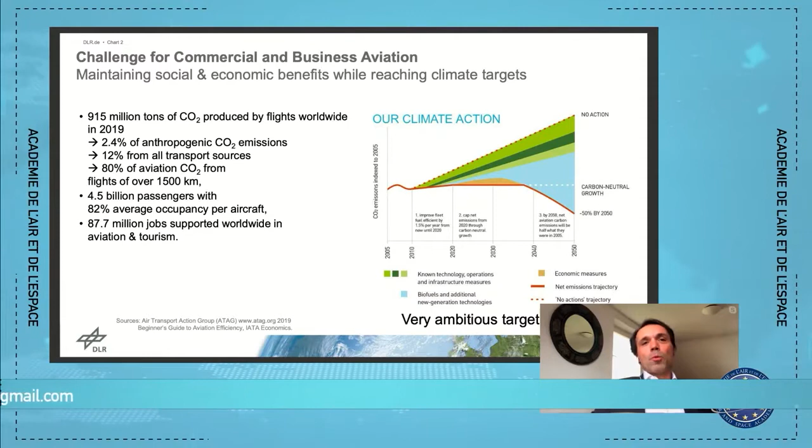Now, the air industry is a huge industry. We're looking at 4.5 billion passengers going from one country to another, one region to another. Well, the movement of people is what creates jobs. We have almost 90 million jobs created by aviation alone. So we can't put an end to that, but it makes sense to organize a transition towards a decarbonated aviation industry.

On the right-hand side, you have a well-known chart. There are many others, but this has been around 10 years. This was in 2010, 2011, so exactly 10 years ago, such a chart existed. And what was being highlighted here, and that should be a strong point, if you look at technological improvement, we can bring down fuel consumption and therefore CO2 emissions to the tune of 1.5 to 1.8% annually. So accumulated, you are looking here at spectacular numbers.

Nonetheless, that is not enough to reverse the trend or indeed to reach the objectives stated by society or indeed the air industry. So, of course, I was fortunate enough to work for a research institute. We take this as a starting point. What we do find is that these goals are very ambitious indeed. So how do we propose to go anywhere near these objectives?

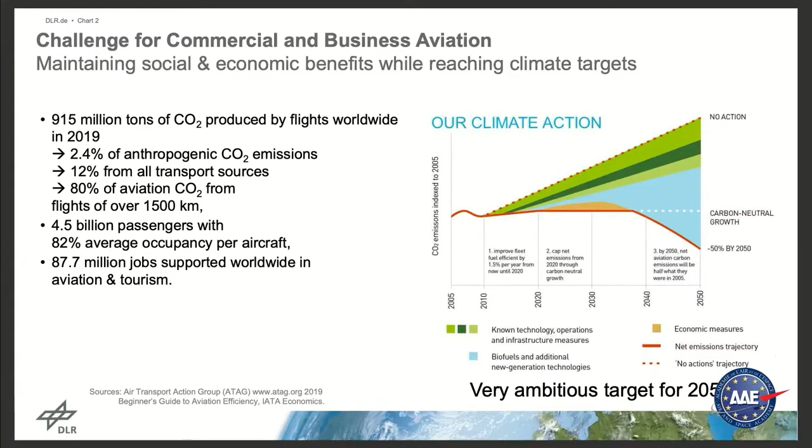And one item that was made clear this morning is the cumulative effect. Global warming related to the concentration of CO2 in the atmosphere is a cumulative factor with very, very long time scales. So even though, and we saw it today, in 2020 we find that there's a significant decrease in air transportation and indeed transportation in general, nonetheless that is not going to bring about a reduction in CO2 concentrations in the air over the same period of time. It will take a much longer period for this to come down.

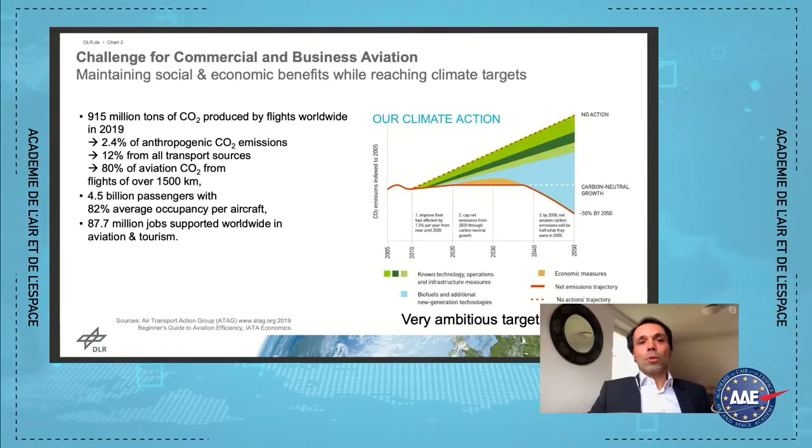So to reach the objectives by 2030 or 2050, we have to start working today. Indeed, we should have started yesterday. We can't expect to start working in 2030 and hope to have results in a few years' time.

Now, on the next slide, this reiterates to some extent what was clearly summarized in this morning's presentation, and of course Xavier went into details of this, but I would like to revisit this chart because you have the emissions from an aircraft, and we can see what changes this causes in the atmosphere, either by chemical reactions, a change of phase, or indeed the presence of aerosols. And then you can see the effects on climate.

So if you burn fuel in the air, nitrogen and oxygen react with the hydrocarbons, so that produces CO2 and water. And then you do have some pollutants as well. Now, a gas turbine uses 99.9% of its fuel and turns it into thrust. So it's a very efficient thermodynamic piece of machinery. Nonetheless, residual emissions remain that therefore find their way into the atmosphere.

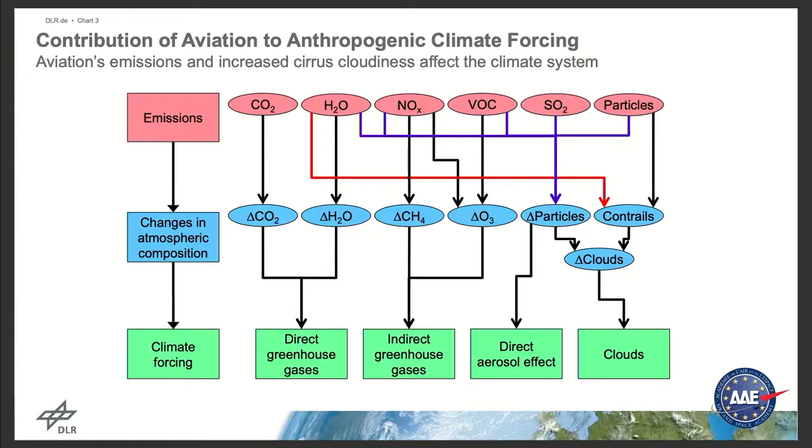So you have CO2, you have water vapor. So whether you burn hydrogen or hydrocarbons, you will find that water emissions will remain up in the air, and then of course you have nitrogen oxides, NOx, that you will find when high temperatures are involved. The volatile organic compounds that are not burnt, then you have SO2 and soot particles. So you have some recombinations. You can make methane or ozone that has an impact on the climate as well.

But let's zoom in on these particles because we find that they are very much related to the contrails that were noted, and which, of course, do also have some effect on the climate. It's difficult to quantify that, but regardless of the actual numbers, it has to be brought down, and the specificity of aviation is you're not just looking at CO2 effects over the life cycle. You have non-CO2 effects, as indeed presented on this slide.

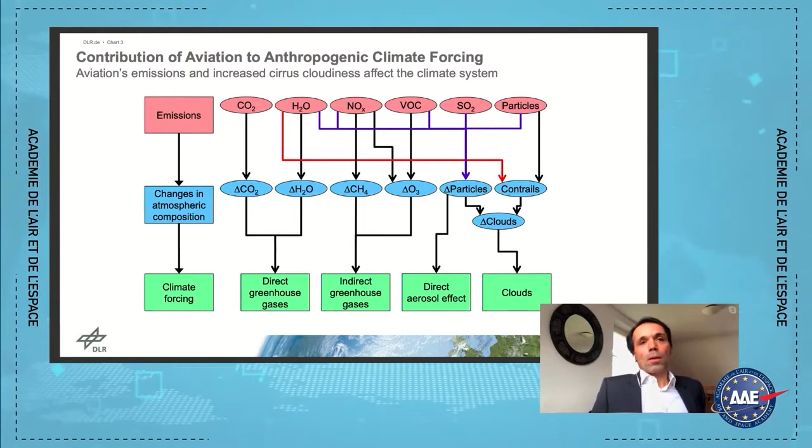So you have a direct effect that causes warming, or indirect effects where the radiative balance is disrupted by reflecting radiation or preventing sun rays from going back into space. So that's the gamut of effects that can happen. It is for the air industry to see just what can be done to contain these factors that have an effect on temperature, both CO2 and non-CO2 effects, which then will bring to bear on the climate.

Now, this slide is a bit more quantitative. You have actual values, for some of the components at least, on climate forcing. You have, of course, an error margin, but research now tries to reduce uncertainty and have a narrower confidence interval. Now, we can see that the non-CO2 effects are much greater than CO2 effects. And if you take everything on board, you'd find that civil aviation has a 3.5% impact compared to other industries. So 3.5% is due to the air industry in terms of the radiative effect.

Now, on the right-hand side, you have a picture that illustrates these factors combined. This is over the northern Atlantic. You have clouds formed up in the atmosphere, formed by contrails, condensation trails, which can stay there for variable periods of time. How are they formed? Well, it's the steam coming from engines.

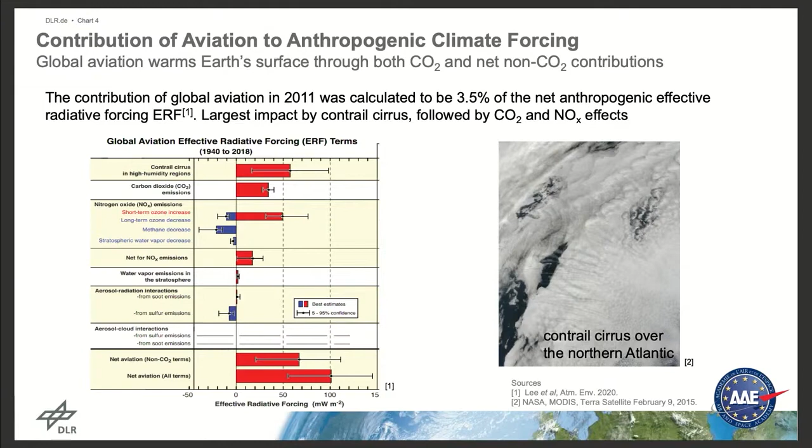And then you have soot particles that come from the aircraft itself, or they may already be there in the air, and you have a large number of micrometric particles up in the air, right up to these altitudes, and that is where this water vapor can condense, and so these visible condensation trails, these contrails, will be formed and be areas where humidity is condensed.

So when you are way up there in the air, such contrails create the forming of artificial cirrus clouds that are created because of the presence of aircraft, and these can spread and indeed cover wide areas and therefore disrupt the radiative balance to such an extent that you have a positive effect in as much as temperature, basically the bottom line is temperature, will increase.

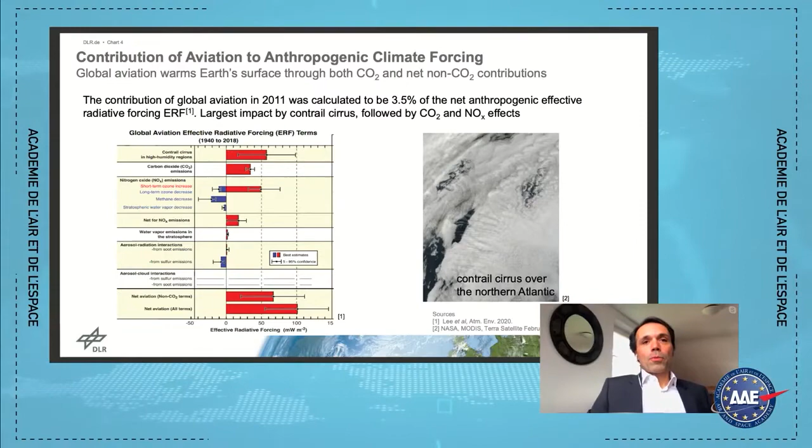You can use wind power, you can use solar power, hydropower. Hydropower has been around for quite some time. It works quite well, and you have more recent technologies, tidal energy and other, well, more controversial forms of energy. But anyway, the energy transition is a well understood concept that has been there for quite some time. And at least in Germany, efforts are being made now to continue activity, but using cleaner forms of energy, and especially sources of energy that can be sustainable.

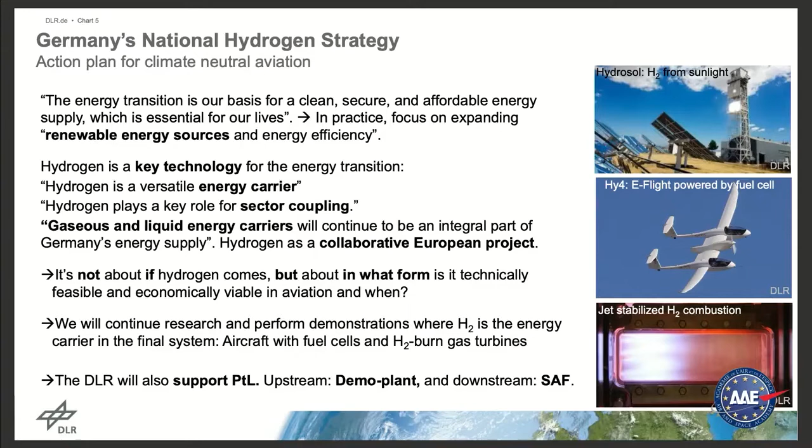In my division or department, we chose a separate path. Upstream, we're going to be looking into how to produce hydrogen-based hydrocarbons, so renewable electrical power, and from there on hydrogen, also taking CO2 from the air. It's part of the PtL, or power to liquid process, and then at the downstream level using the so-called SAFs, the Sustainable Aviation Fuels. So these are the two key ideas the rest of my presentation will be focusing on.

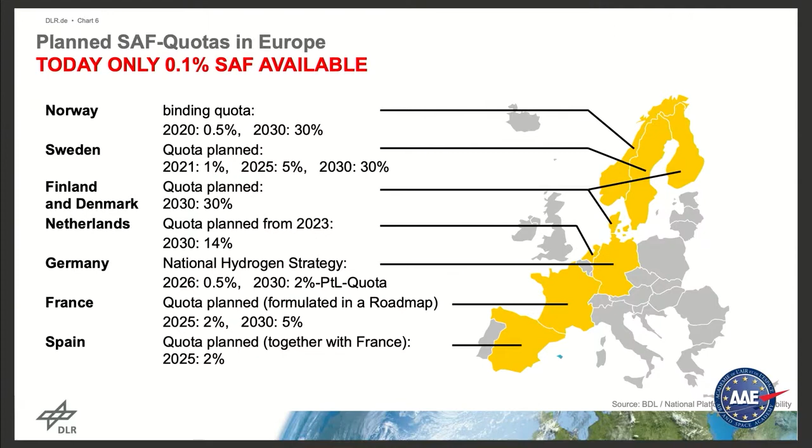So just for context, a few words about the Sustainable Aviation Fuels, or SAFs. I was showing you that earlier plot from some 10 years ago. There has been an increased awareness achieved, and almost 10 years ago, people were sounding the alarm, saying we really have to start working now to produce these kinds of fuels that will enable us to achieve the decarbonization of aviation, and we're at 0.1%, as you can see today, of available SAFs, which is very, very little.

There are binding quotas in Norway of 0.5%, very, very recently in 2020, 30% by 2030, and then in some other countries, rather, there are quotas planned. I mean, these are things that the policymakers are trending towards.

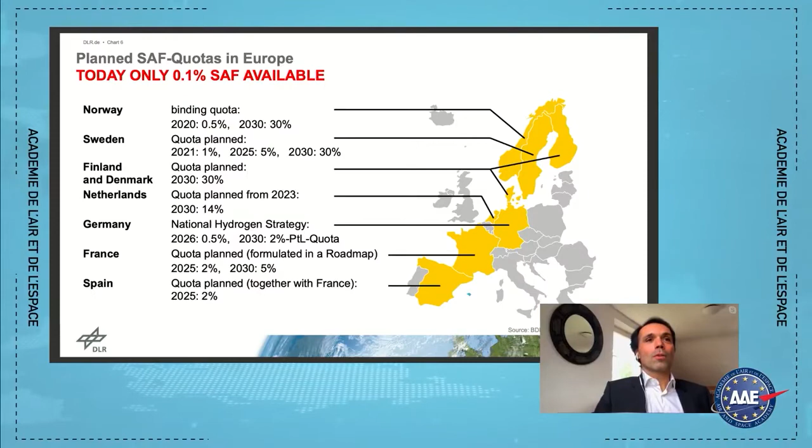So you can see some countries are being much more decisive or aggressive in the short term. Others, perhaps like France and Germany, less so. The more proactive, aggressive policies will no doubt contribute to changing the shape of the curve. But certainly the others, certainly as far as aviation is concerned, will not enable us to meet the expected trends. And one way or another, we're going to have to do something about this figure of 0.1%, as you can see.

What we are trying to do is to use fuels or technologies, rather, that have shown their worth and that can still fly. The lifespan of an aircraft is quite long, and you can't just renew the whole fleet overnight just to achieve those goals. So we need to develop alternative fuels which initially at least are drop-in, in the sense that they're fully compatible with current airports and aircraft.

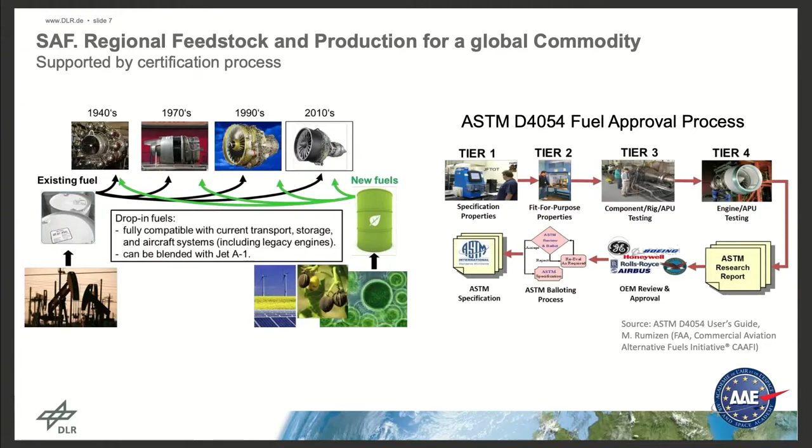And this is done through a whole lot of testing, which is costly in terms of time and funding. But the first and foremost rule in aeronautics is flight safety. And so this is essential if we are to make sure that these fuels that are on the market do not pose any technical problems for being loaded into aircraft for propulsion purposes.

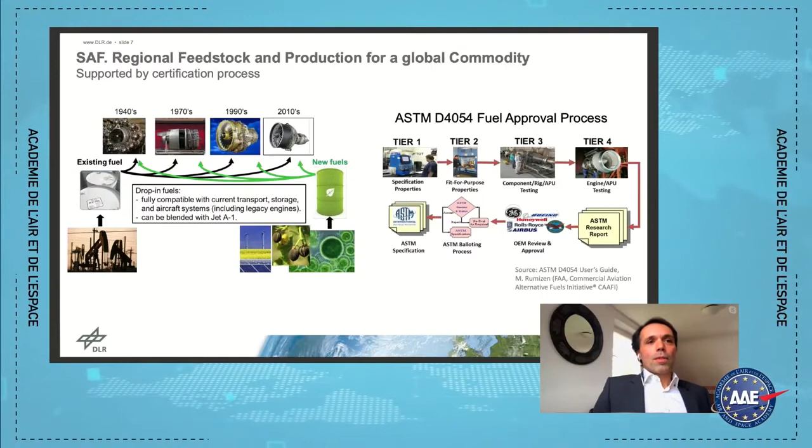So Jet A1, the kerosene that we're familiar with, is not simply hydrocarbon which is burned to turn chemical into mechanical energy. It is also a heat exchanger. Almost 80% of aircraft will be using that very high performance fuel. And you can't just replace it with ethanol, although it might work well for terrestrial vehicles.

So having established that we have some 8 different kinds of alternative fuels that can be used, and there are others in the pipeline which are going to be studied, considered, possibly approved, we need to look into their properties and see why it is that these specific fuels could be dropped in lieu of existing fuels,

and possibly in a relatively close future to try to optimize these fuels and maximize the advantages these synthetic fuels can deliver. Because now we're no longer talking about a fossil fuel that nature provides, but rather a synthetic fuel that we synthesize ourselves, and that thus could possibly leave us more leeway for optimization and reduction of emissions.

So gathered together in one plate here in a very condensed summary form, you can see what we are doing in the lab where I work. We look at the composition of the fuel. We look at the properties of the fuels. In this case, the example is Jet A1, but there might be plant oil or recovered oil-based fuels.

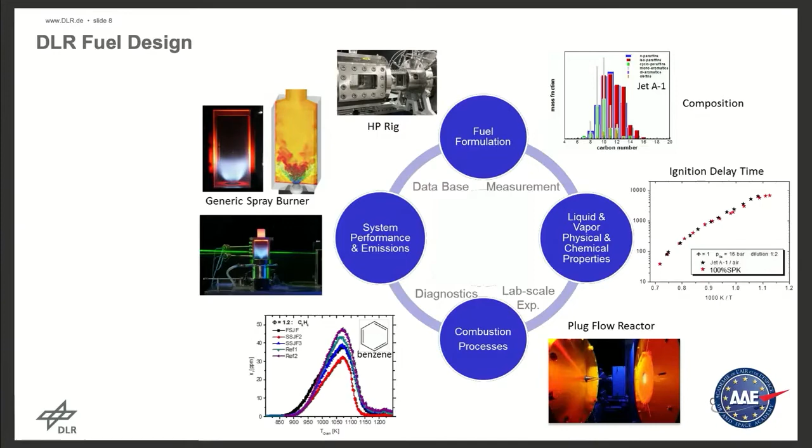And so we look at this with a reactor in particular that enables us to look at some of the intermediary species that occur. Some of these are precursors for the soot that I was talking about earlier, which are not a desirable thing to have in your environment or the environment close to airports, but nor do you want them present at high altitudes because of their ability to provide for the condensation of water.

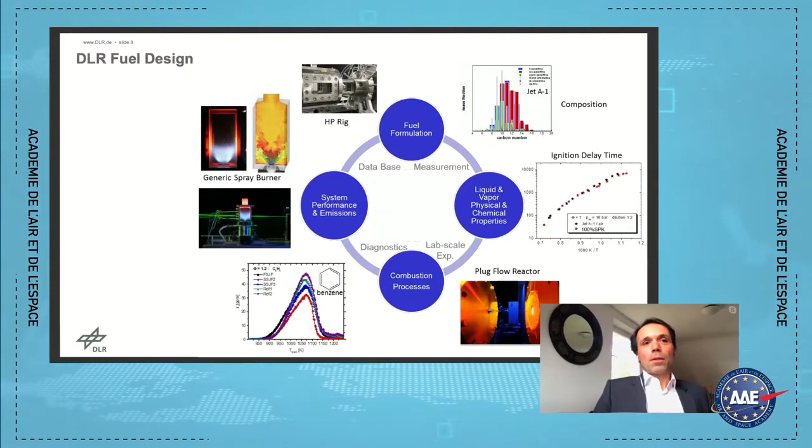So we want to cut down on the amount of soot, and depending on the type of fuel we're looking at, we can cut down on some of these precursors of soot, such as benzene, but there are many other kinds as well, and work on the makeup of the fuel to try to achieve this. And we can then observe this in the reactor or in generic flames, let's say, but also under pressure on test benches and directly in real conditions at high altitude.

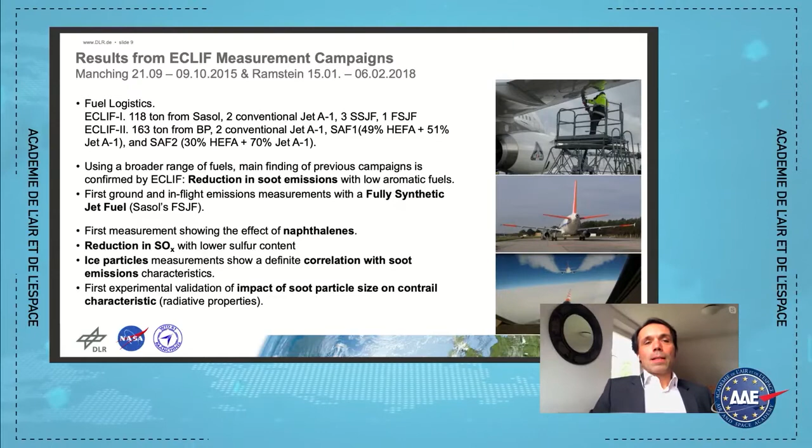And this is a measurement campaign I was fortunate enough to take part in. There were, in fact, 2 campaigns as part of the project, one in 2015, one in 2018. And during both campaigns, we burned different kinds of fuels, comparing them with Jet A1 as a reference fuel. Some of these were fossil fuels, but that were synthetically made, looking at different possible variations in composition.

Of course, we were doing this in an experimental way to see how different compositions of fuel might behave, and to check whether what we saw in the lab would be verified in the air, looking also at the difference between engines on the ground and engines in flight, the exhaust gases that are released when you are at altitude, as you can see in the bottom right picture, and when the crystallization of ice particles occurs. So this enabled us, through these campaigns, to measure different behaviors associated with different kinds of

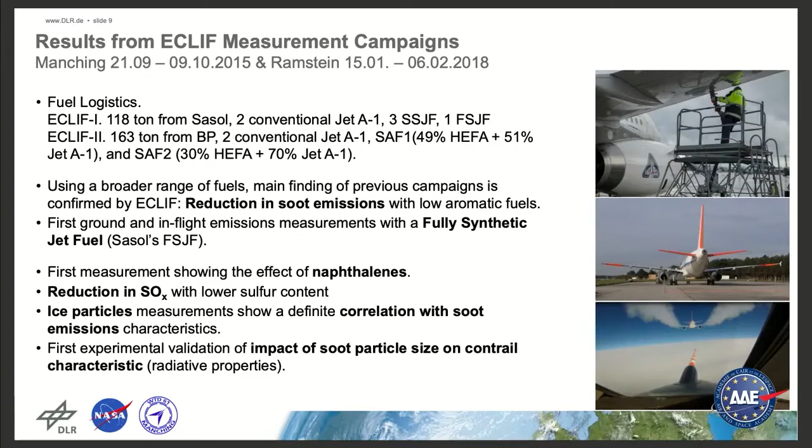And we also saw the connection between soot emissions and the concentrations of ice particles in the contrails. So we can reduce the effect on the radiative balance, which is exactly what we want to do.

Now, looking more closely at the second campaign of 2018, we were comparing two, let's say, sustainable fuels based on the HEFA, or the hydroprocessed esters and fatty acids. And we had different proportions. In the first case, 50%, the second 30% of the Jet A1. In the second case, there was 30% alternative or SAF fuel, but it still enabled a marked reduction in the amount of soot.

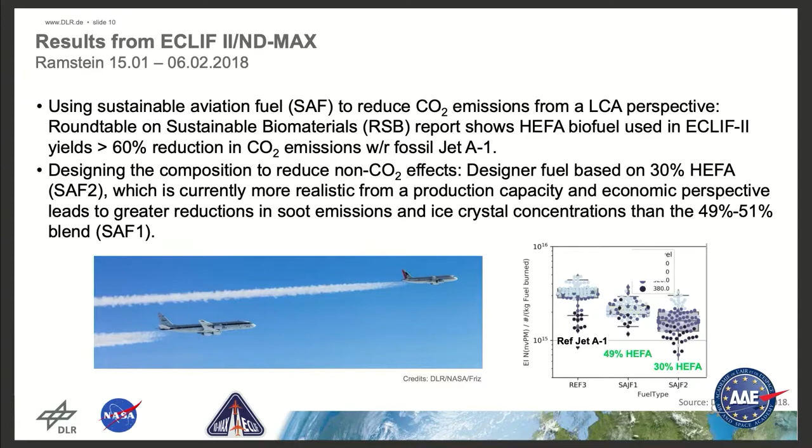So what we can conclude from this is that by looking at the composition of the elements of these fuels, we were able to achieve encouraging results while remaining at economically viable levels, even though these fuels are very much more expensive than traditional kerosene. 50% for that reason of new designer fuel would not be achievable, but 30% is more achievable, and that is why in some cases there have been trials.

So I have shown the connection between the fuels and production of soot at high level and contrails, how we can try to reduce these to have less of an impact from aviation on the climate. And if indeed we can reduce the production of soot to the tune of 80 to 90%, which is achievable, correspondingly, we will be reducing the radiative balance.

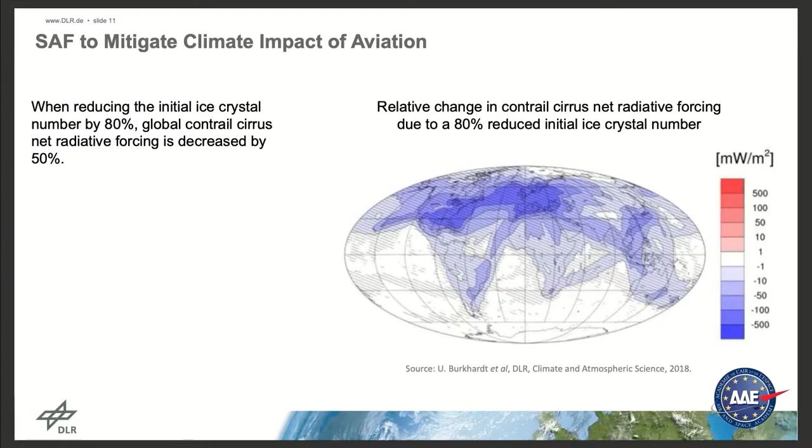Clearly, for all of us, air transport and tourist travel in the future will no doubt be somewhat more expensive, but this will be with the aim of trying to reduce their impact on the climate. Now I'm going to talk about hydrogen. We've seen traditional fuels that can be blended up to 50%, and that's already allowed, and you can substantially reduce the climate impacts of aviation.

In the very short term, I think that it would also be doable to use these synthetic fuels for 100%, with all the associated benefits, the CO2 reduction over the life cycle, but also all the emissions I've just talked about. And in the more or less distant future, the use of hydrogen. Here, these are the two options. Either you burn the hydrogen directly, which is similar to what was shown earlier, that will lead to differences in the engines and also the shape or the length of the aircraft.

It depends how you consider it, but in order to be able to transport this fuel, since its energy density is very different, if you liquefy it, you'll need 4 times the size of current tanks. So that's probably going to change all this. And there are also lots of questions that are still open. So there is a lot of work at the DLR in this direction to try and solve these technological questions.

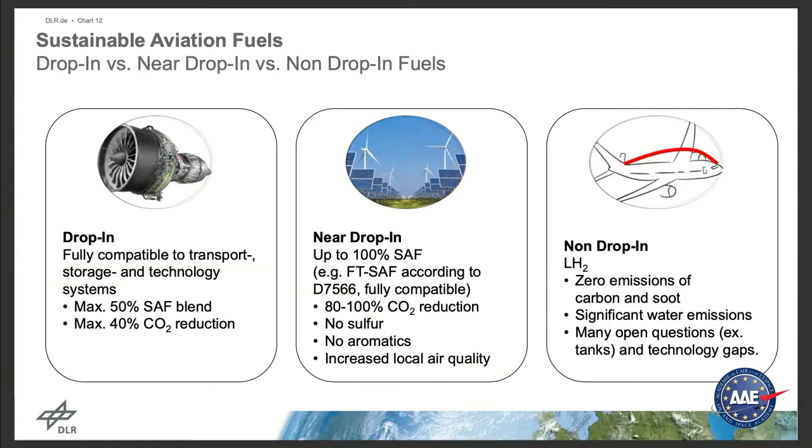One example that I could show you, I'm in a combustion institute, so I'll show you a few combustion examples on this next slide. Here it's if you're considering to burn the hydrogen directly, what is that going to lead to?

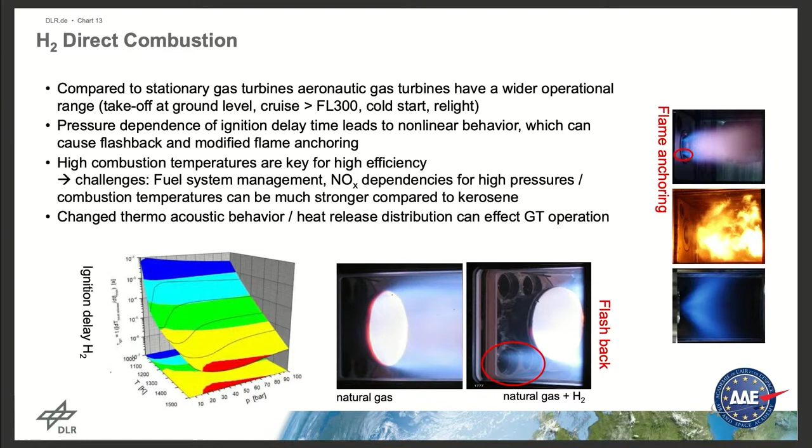This is something that you could consider doing right now. So you could produce electricity via stationary gas turbines, where you could use almost 100% hydrogen. In aeronautics, though, the range of thrust and power that's required and the range of performance for gas turbines is much wider. So that requires a huge effort in terms of research and development in order to be able to create these engines that would burn hydrogen directly. We think that it's feasible, but you need to be careful about a few things.

At the left, you've got a graph showing the ignition delay times for hydrogen when it's mixed with air, and you can see that there's a non-linear behavior similar to other fuels. If you increase the temperature, you reduce the ignition delay, and if you increase pressure at first up to 10 or 15 bars, you'll slightly lengthen the ignition delay, but it will suddenly drop. So to produce and design an engine technology that can cope with the specific properties of hydrogen, it's relatively complicated.

Here you've got examples. On the right-hand side pictures, you've got a green flash, a flashback that shows that the flame will flow back into the injectors as a gas, and so that's dangerous. It can damage the engine. And there's also a different way in which you stabilize, anchor the flame that can be too close to the injector. All these aspects can be fixed, of course, but these are things to keep in mind.

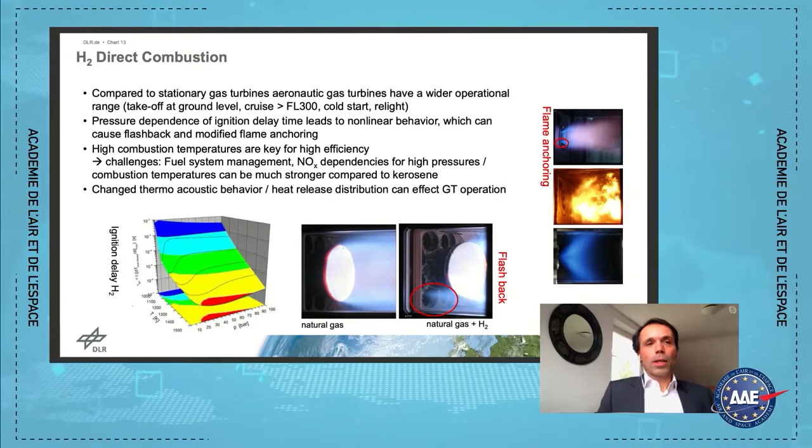And that's only the example of combustion, in many other areas like storage. That's a fuel that burns very well and very quickly, so you need to be careful about safety aspects. So first you need to fix all that before you can fly with this fuel. That's why on the next slide we would like first to work with the use of hydrogen, but in order to produce a liquid hydrocarbon that will help us use current infrastructure, both in terms of transport, but also storage and fuel use.

Earlier, I showed you the German policy regarding hydrogen. There's a whole strategy that's going to unfold around hydrogen, in particular for some modes of transport like aviation that really doesn't have an alternative for long-haul flights. There's no alternative, at least until 2070, and probably also for road transport, such as lorries. There are very few alternatives, so these fuels are going to be useful. So in this German hydrogen strategy, there's a form of mandate, which is to expect up to 2% of PTL-based kerosene for aviation.

What is already available? The various components required for the production of PTLs, power-to-liquid fuels, already exist at different levels of maturity and at different scales. There are some pilot plants in existence to produce up to a few kilograms per day, some of them in Germany. I saw them, they work, but now we'll need to bring this technology to a demonstrator scale so that we can then reach marketing scale and also address the various technological questions and challenges along the way.

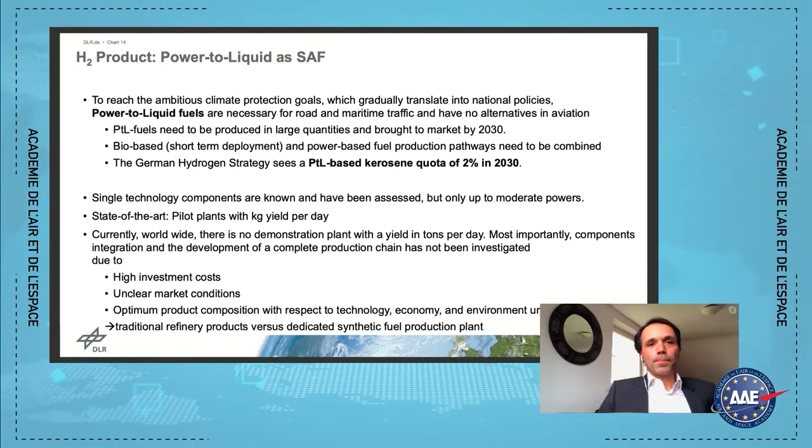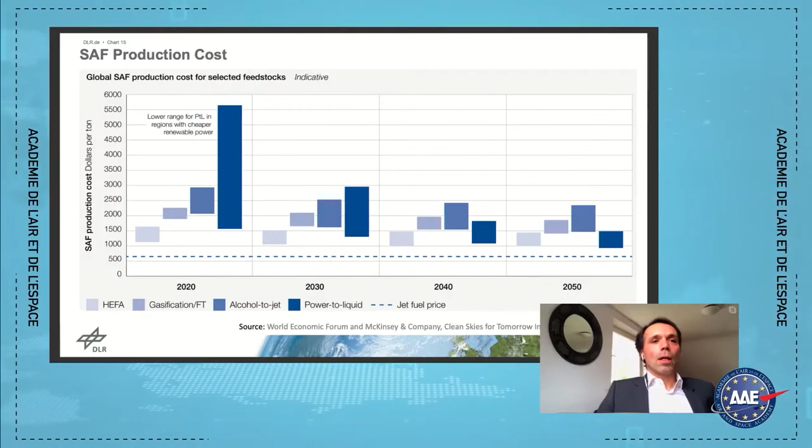Next slide, please. There was a lot of text, so I'm coming back to a picture-heavy slide, a comparison of prices, comparing different technologies based on biomass that can be planted and grown, or rather bioorganic waste-based biomass.

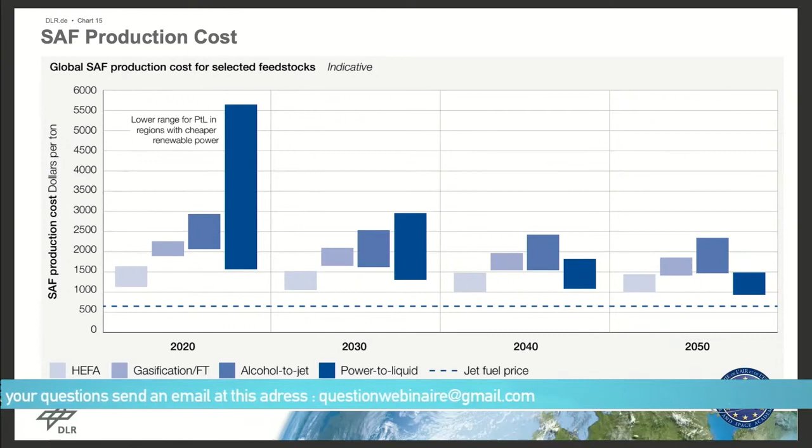This is HEFA, hydro-treated esters and fatty acids, also gasification FT. So gasification, that's municipal and organic waste that's going to be gasified. And so the synthetic gas coming from gasification can then be reused in the Fischer-Tropsch process in order to produce hydrocarbons.

And so alcohol to jet: biomass such as sugars and starches can be turned into various alcohols, ethanol or butanol or isobutanol. And with various processes, they can be turned into jet fuel, and there's also power to liquid. So first of all, the quantities are not there, and prices are exorbitant for power to liquid. But what I'm highlighting here in the 2020 column is that we need to have these pilot units and demonstrators so that we can scale up very quickly.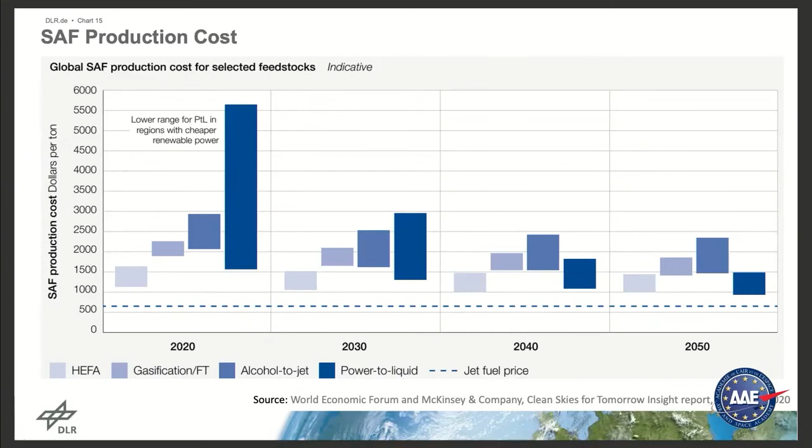And then you can see that with this scenario produced by McKinsey on request from the World Economic Forum, the scenario predicts a price reduction, and based on the benchmark price of jet fuel, you can see that there might be a market.

On the next slide now, I've shown you how we are conducting research on the various SAFs, these alternative fuels, and this is what we are considering as demonstrators for PTLs. This is a pre-study that we're involved in with another two partners, an engineering firm called John Brown Voest and the Technical University of Hamburg, with support from the Ministry for Transport and Digitalization. So we are conducting this pre-study to look at the components to be selected in order to build a demonstrator that would help us produce up to 10,000 tons per year.

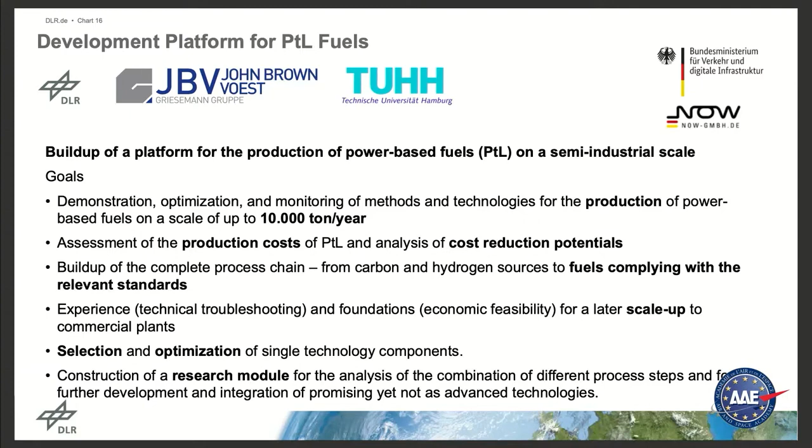And then there are going to be technical, economic studies, and then product optimization. The first product is going to be kerosene, but there will also be byproducts, and we'll need to see how we can use them. Alongside this demonstrator, there's going to be a research module where we can look at potentially less technologically mature components, but with a lot of potential in terms of performance and, above all, better efficiency.

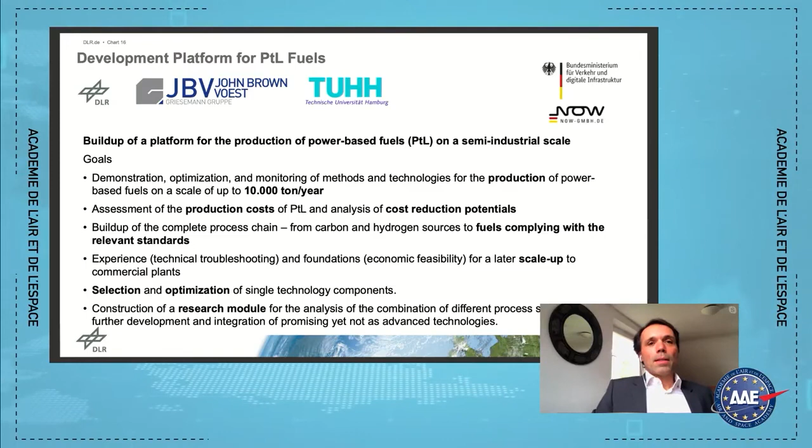Last slide, please. So here you've got what it may look like. This is what we call our demonstrator. What is important, and that's why you can see them as jigsaw pieces, these various modules are interchangeable. So there's not just one operator and research institute. Several can come and test out their various components.

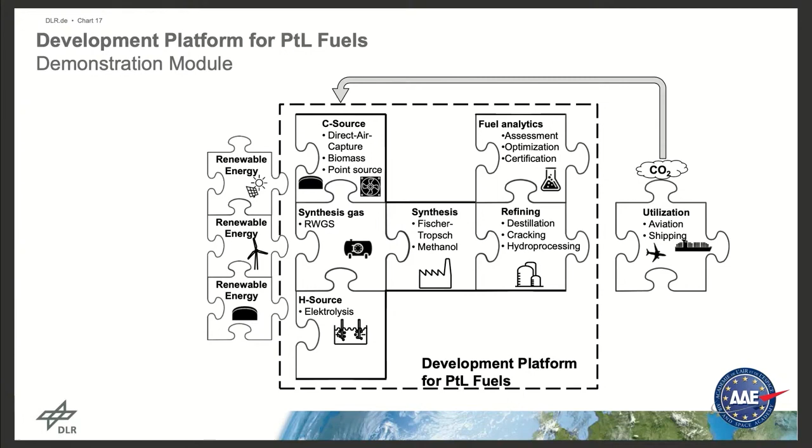So you've got the renewable energy sources on the left, various kinds, and then the first transformation step in order to produce a source of carbon monoxide if you're using Fischer-Tropsch from CO2, and CO2 for the demonstrator may not be directly captured from the air, but rather maybe biogas. Biogas production generates CO2, which is renewable. So that would be a first source. Then an RWGS, reverse water gas shift reactor, to turn CO2 into carbon monoxide by using a part of hydrogen, and the hydrogen was produced by the electrolyzer.

So first, a simple electrolyzer using water to produce hydrogen, and at a later stage you could have co-electrolysis, so CO2 and water directly producing synthetic gas, so CO and hydrogen. And then either a Fischer-Tropsch route, as I mentioned, or you can go through methanol, which is interesting because you don't need carbon monoxide. You can directly use CO2 and hydrogen. And then the downstream part, which to me is fairly traditional. There are a lot of questions about certification when it comes to refining and use.